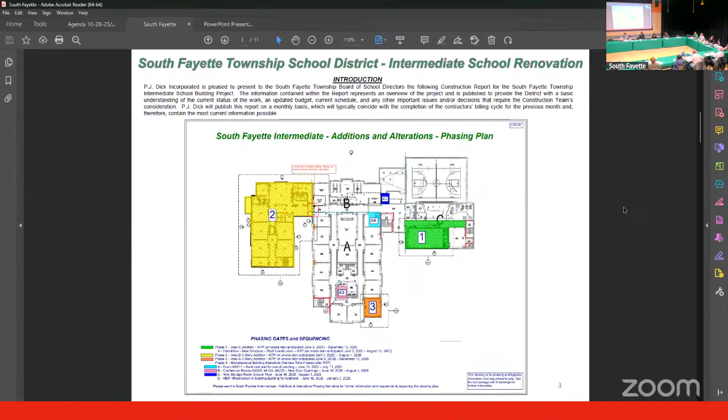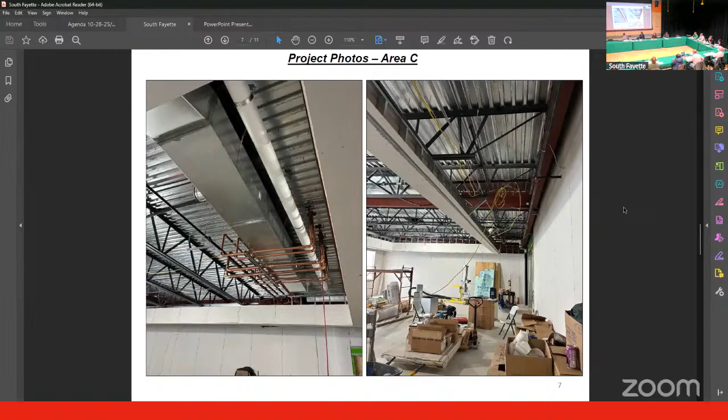I have a few pictures. I don't have any drone photos this time. I will try to get those from R.A. Glancy for the next meeting. Area C, again, this was a few weeks ago where the drywall was ongoing and some duct rough-in was occurring. Just another shot of the ductwork on the left and the drywall. So that has changed quite a bit. These photos are probably 2.5 weeks old.

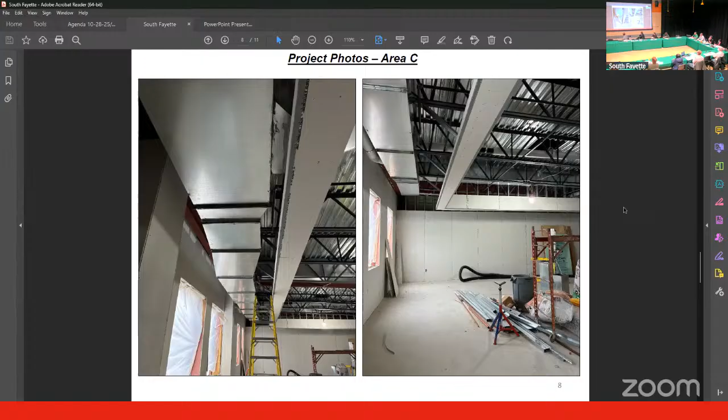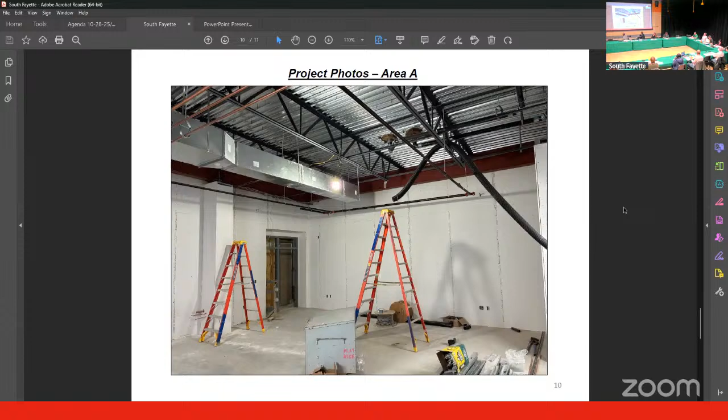But it has opened up now since this photo was taken. Area A, the three-story classroom addition, similar state, some ductwork going up in each space and all the drywall and the frames installed that go out to the hallway. Just another picture. That far corner where you see the blue and the drywall, that's where the unit ventilators sit for each classroom that gives you cooling and heating. Those are on site and installed and being piped in and connected to the ductwork as well. These pictures were 2 weeks ago. I think those UVs hit the site about a week and a half ago.

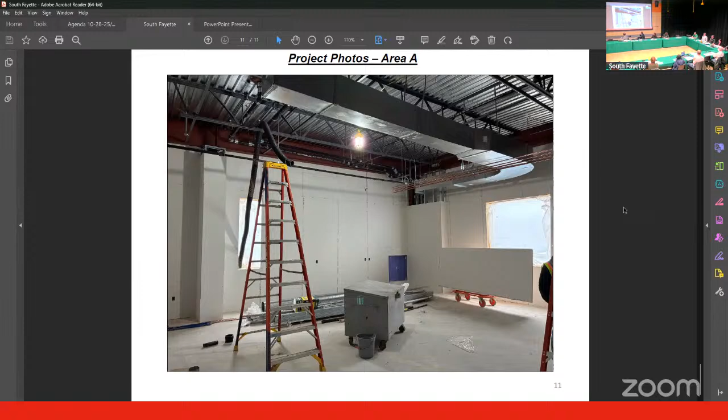And that's all the pictures I have. So that's sort of the progress of the project to date. The financial section, there are 2 change orders, I think, on the agenda, maybe under 1 change order number.

So change order 4 for R.A. Glancy: your agenda consists of a gate added at the basketball courts on the playground for future access when you would need to get into that space. It was a level 1 change order, and those gates have been ordered. They're not installed yet, but they're on their way.

The second item is a level 2 change order. In the corner of area D addition, the BMP rain garden installed when the building was first built protruded into the footprint of the foundation, an unforeseen condition. So those units that were in the ground had to be removed to continue the foundations for the building.

Can I interrupt you a second there? Sure. I don't know that I have that in front of me. What's the amount of that change order?

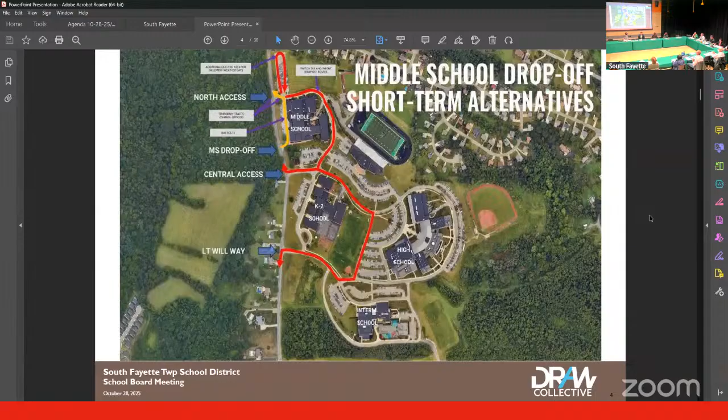That is a temporary solution to the problem, given how the existing circulation works with the campus now and its facilities. There was a concept put together by the traffic engineer that basically included, once the new K-2 building is built, how could the site be modified, and how could the traffic pattern potentially be modified to make another improvement if that's possible.

They offered a suggestion that actually runs an option through in front of what would be a closed school and round through towards the middle school. To make that happen, a revised entranceway realignment would have to be done on campus to make that road along the frontage of the middle school connect onto the existing K-2 building.

I say there's nothing really to talk about at this point because we're so far from this. We're years from being able to do something like this. There'll be much more review and discussion about long-term improvements on the campus and whatever scope might be. But if you had any questions, I'll try to answer them.

I had a question on that. This traffic study, I thought it was to give recommendations for what the traffic flow would be when the new K-2 is in place. Is that true?

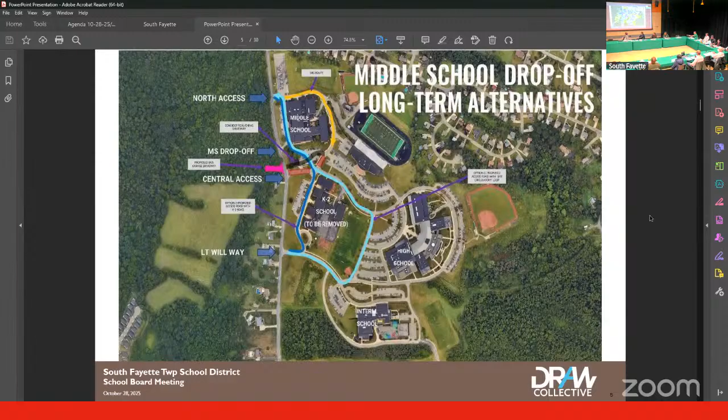Over at the intermediate, I'm going to skip this construction phase because we've talked about it. The pool project is just about done. We had a couple of snafus at the very end. The engineer did not include installation of the refrigerant line on the roof that goes from the condenser to the unit, and that is a change that's before you tonight.

I believe there's another one that's related to internal controls and ductwork. There's a sensor that needs to be installed that was not included in the contract. They omitted both of those things.

Well, that's what I say, but the contractors - everything's contractual. They bid the project, and if they don't see it in the documents, then they don't provide a price for it. So you didn't pay for it yet. And so it needs to be added to the project to get it accomplished. But they bid a functional HVAC system.

Yeah, it's just not a GMP kind of situation. It's exactly what is in the specifications or what's on the drawings. And if unfortunately the engineer left it off, I can't argue. We of course negotiated the price to try to make sure that it was accurate and fair.

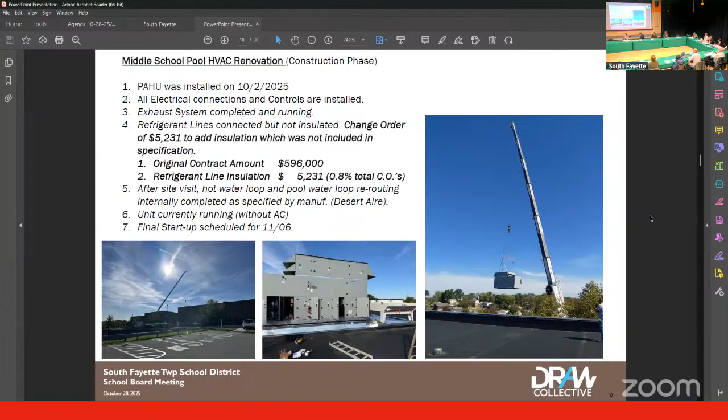The bus depot project - lots of things have been going on. We have been out for bid, and we received bids this week. So we're crossing our fingers that we get good numbers. We have quite a big list of bidders, so we have some good activity. Hopefully the numbers will come in good.

Our biggest challenge on this site is, of course, all of the grading. It's a very complicated grading project. Lots of earth moving. The building is very small in the scheme of things, but there's a lot of earth moving and paving. So we'll see how those come in.

Dan, were those bid out separately, or was it all bid out as one project? The bus depot is all one big project. It got separation of primes, just like all of the projects. So we'll have a GC, a general contractor, a heating contractor, electrical, and plumbing. The excavator's part of the GC's contract, right? That's correct. And when's the bid opening? Thursday morning at 11, I think. Okay, thank you. So we'll be reporting quickly.

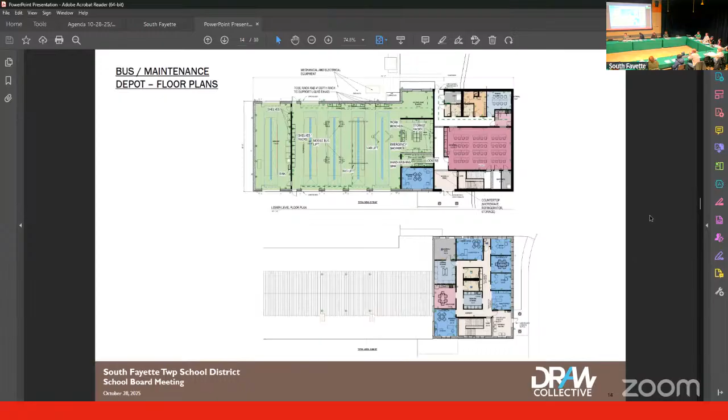Over at the K2, design development is complete. We're into early stages of working drawings, headed for trying to be complete by the end of January. We've had lots of meetings.

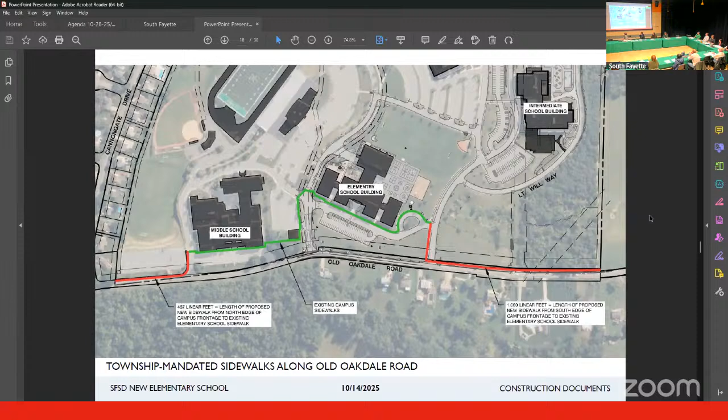Just the site plan of the new school and all the things that are being affected. There's nothing new to report. It's still the same. This has all been sent to DEP and is in its final stage of approvals.

At our last meeting, we talked about adding some additional geotechnical borings to confirm some of the things we found in the first round of borings, to get a little bit more detail. As with all of our grading challenges on the site, it doesn't really matter which location you're at - we have a challenging variety of underground geology, and it's different from one place to the other. Its depths are different, and so the additional borings we requested will help us refine the areas where we had either missing information or wanted to clear up the difference between two borings that were maybe spread apart. Hopefully the results of this will help us finalize the foundation system of the building and what needs to be done.